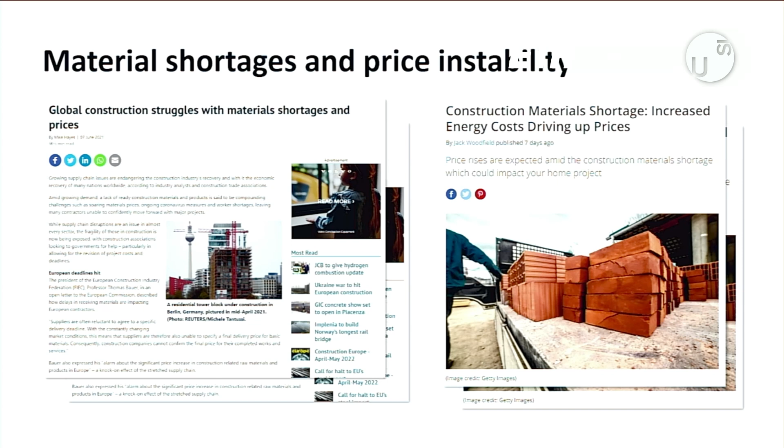These shortages in construction materials led to big price changes, particularly in things like mass timber, making construction very volatile in terms of building and pricing. And these are problems before we even address some fairly major problems in the built environment around carbon - 40% comes from the built environment.

About November time, every time I do a lecture, I use the World Counts website and take a quick screenshot to see where we are. For the last 3 years, we've been pretty much on track for 43 gigatons of CO2 emissions per year.

Perhaps one bright spot, the EU recently said that their carbon reductions are showing the kind of reductions needed - I think about 8% - to meet the Paris targets, but globally that's not the case.

I had the pleasure earlier in the year of attending the Buildings and Climate Global Forum in Paris, which was a breakout session from COP, specifically to look at the issues in the built environment and how we would meet carbon targets associated with Paris.

There I saw and heard lots of enthusiasm from nation states to develop plans and commit to decarbonisation by 2050, but without very many plans actually in place. At the same time, lots of ideas and lots of enthusiasm for how to solve the problem.

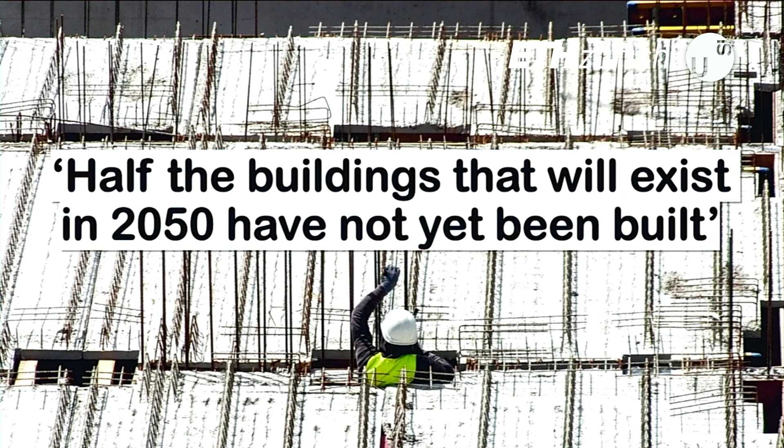According to the UN, by 2050, half the buildings we'll have then don't exist now, so we're almost doubling our building stock.

We're obviously talking about buildings, but in terms of infrastructure, there's a huge infrastructure gap according to the World Economic Forum. We also see, with the tragic events in Spain, that we're going to be building a lot of infrastructure just for climate resilience. So there's a huge amount of building in front of us.

We have 4.2 billion people living in our cities, and that rapid urbanisation, largely unplanned, has led to some really poor conditions. Sao Paulo, for example - and I find this astonishing - went from 2.5 million to 22.5 million in the period of about 50 years.

That rapid urbanisation means we have 1.1 billion people living in inadequate housing. And if we're really serious about the Sustainable Development Goals, then we need to build housing as a basic need and all of the social infrastructure that goes with it. So the outlook is that we have a lot of things that we need to build for society.

And then there's another 3 billion people coming to the planet by 2050. That in effect equates to 100,000 houses per day.

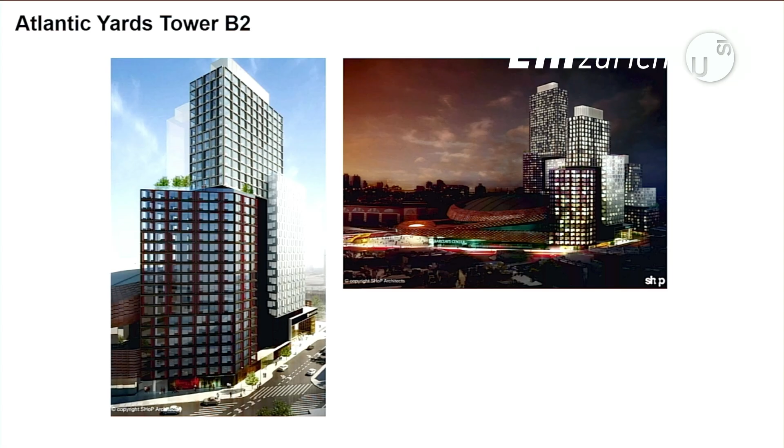But at the same time, a lot of modular contractors have failed in their efforts. This is an example project from our New York office, Atlantic Yards. It's still with SHoP Architects in New York. It's one of the biggest modular projects built, but there were huge issues with how to deliver this in terms of the contractors and the supply chain and so on. So the construction industry is still trying to solve this issue of how to do modular construction successfully.

But if we can get this right, then we really can change the way we build things. And I would also suggest that because it's a component-based design, a lot of the ideas that you're working on in terms of digital printing, fabrication, optimizing components can be integrated more easily into modular construction.

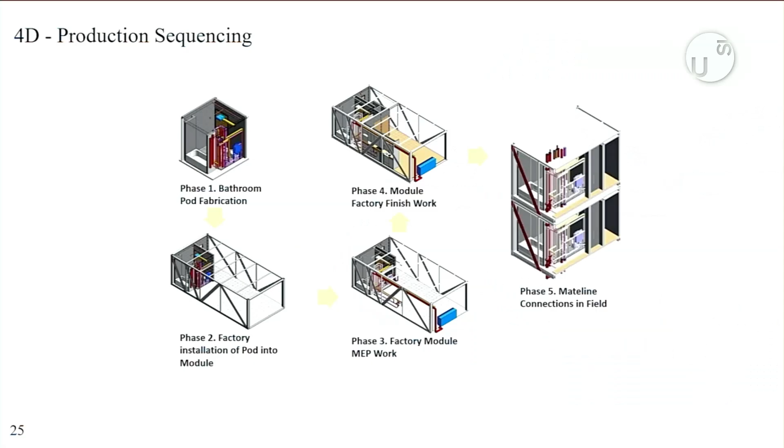It also offers a route into deconstruction, which isn't currently planned, but could easily be, I think. So very simple component-based design, putting things together, being able to be very selective about each of the materials and the waste streams that come with it and the reuse potential.

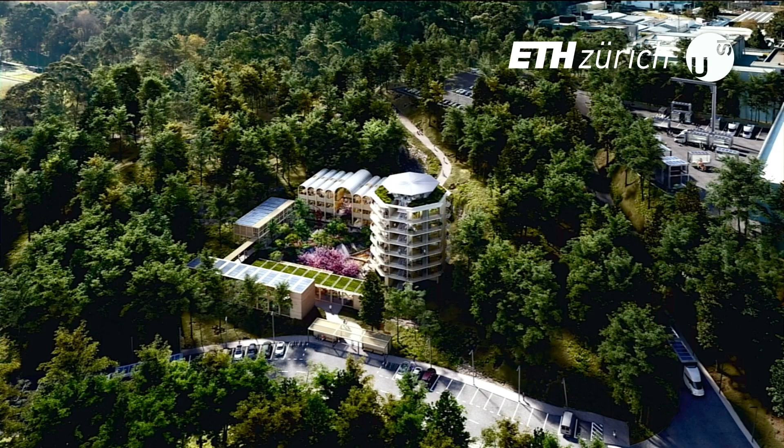And I'm working at the moment with the Norman Foster Foundation and a contractor in Portugal to develop a modular housing system that could be expanded across Portugal and Europe. Their idea of changing construction, but a hard path ahead because modular construction is very difficult to bring to the market. And then off-site construction.

It's an assembly of parts. Whilst this wasn't designed to be disassembled, it could easily be, and that's the next step, that we design this for disassembly and then we can change it and develop it over time. Because a lot of these commercial buildings, design life of many of the components is under 25 years. So we can already see a future where this is reshaped and redeveloped.

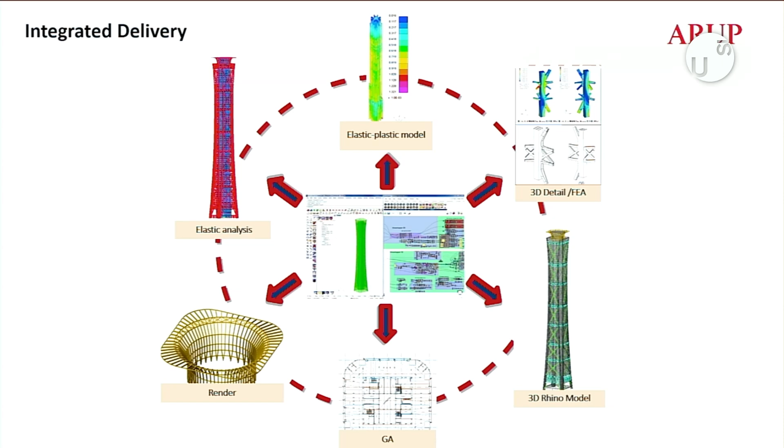But by putting together all of the computer and software power that's available and linking programs, it's possible now to be able to optimize buildings like this to create the most value from the materials in terms of usable space in the building, but also to minimize the materials footprint of the building.

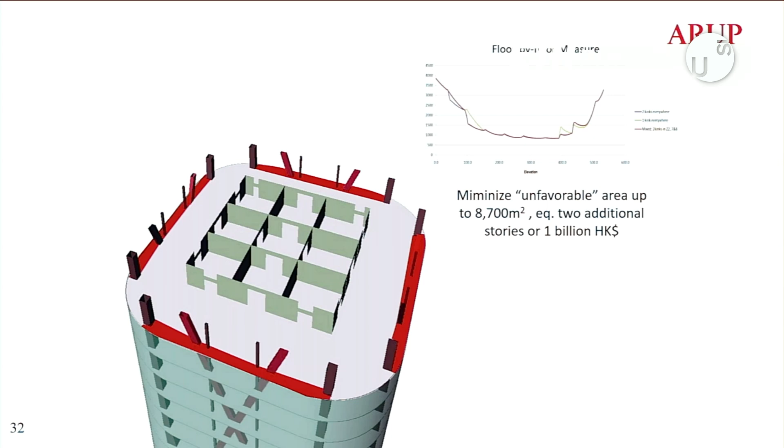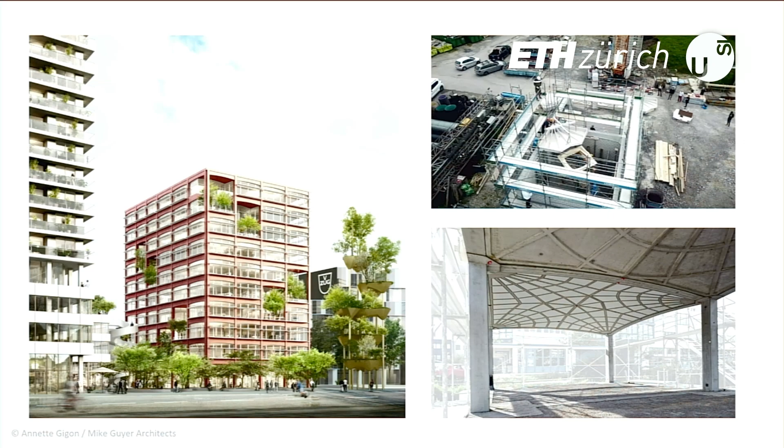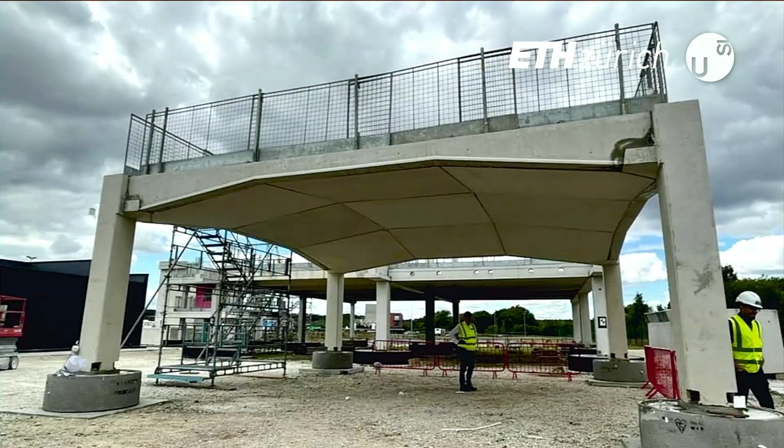In London, we've been working with Laing O'Rourke, the contractor for Leadenhall, to develop similar systems - I might call this perhaps 1D printed. It's precast flat slabs, 10 centimeters thick, arranged in compression. Laing O'Rourke tell us this has been very difficult to build and put together, so there's some development to do in the precasting technology. But in effect, this is replacing what would have been a 30 centimetre in situ slab, so 3 times as much material in our conventional solutions.

So huge opportunities to reduce the amount of materials we're currently using in our buildings. Optimization is basic common sense, but it's still not going to solve all of our problems when the demand is growing so substantially.

That brings us to the idea of reuse, particularly in a European context with a renovation wave. This project, now very well known, from Lacaton and Vassal, is a real exemplar. It's a housing development - they've done two, one in Bordeaux and one in Paris, where they're able to keep the residents in place. One thing you find when you look at these projects is that people want to continue to live where they live with the people they live with. So how do you upgrade and renovate these buildings? In this case, they added a bay to the building.

This project really caught my attention - it's in Canary Wharf in London, built about 25 years ago as an office-led development. I actually think it's a very good development, but through COVID, people have started working in different ways. Companies have rethought their portfolios. HSBC are leaving one of the main buildings in Canary Wharf, a 200-metre tall tower. So what do you do with it? Canary Wharf at the moment are completely rethinking what their development looks like, what their district looks like, and introducing ideas of mixed use into the buildings.

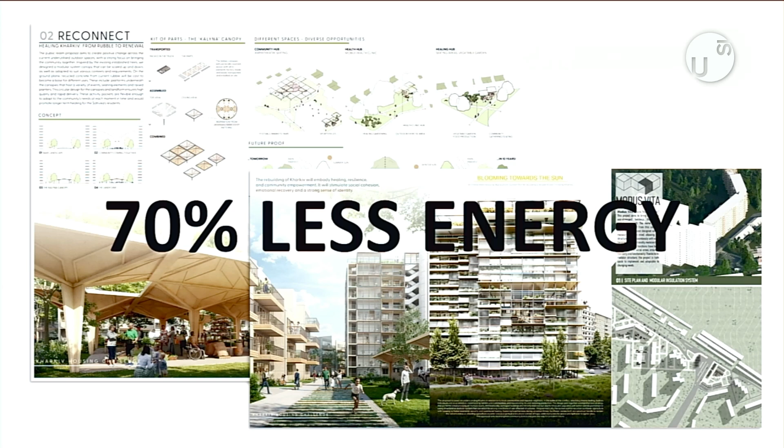We've just completed an international competition to look for solutions. One thing that stood out to me when we analysed these buildings is that by upgrading the building fabric, you can improve the energy performance by up to 70%. In Ukraine at the moment there's a huge rush to provide energy to power these buildings, but if we could somehow improve the energy performance, we'd really do a lot in terms of the supply-demand equation.

This is a project in London, again 25 years old, that we've been asked to revisit. Number 1 Triton Square, it's with Arup Associates. One important fact here is that we had all of the information on the building, a lot of digital information, so we were able to pick it apart. Although it wasn't designed to be changed and disassembled, that's what we've been able to do.

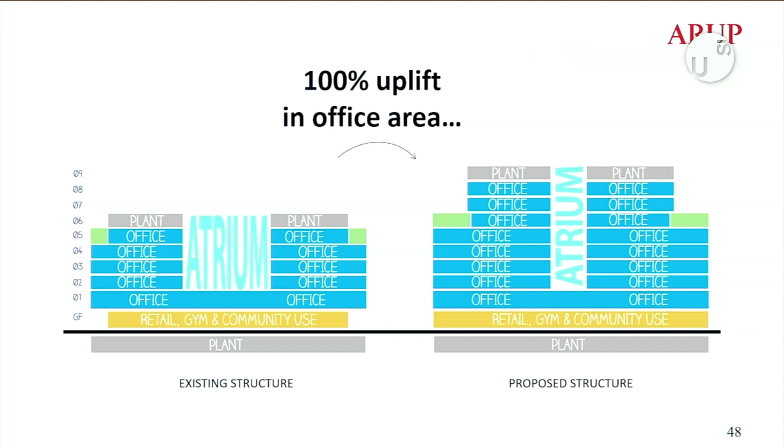It was also in the era of large atrium spaces. So by infilling the atrium and adding floors to the top, we're able to keep the character and the architecture of the building, but double its size.

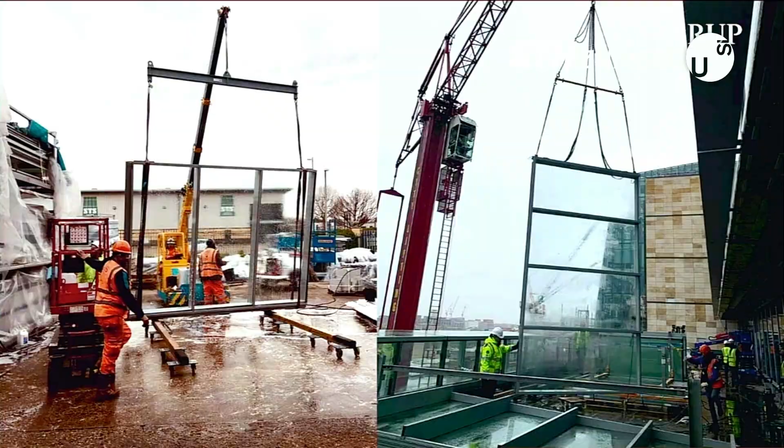Because of the data, we're able to look very closely at all of the components, take the facade apart, take it off-site to a pop-up site, refurbish and remanufacture the bits that were needed to change, put it all back together and then put it back on the building. With the stone quarry, we were able to reopen the old stone quarry, and by taking the stone off and mixing it up, we'll be able to create a new stone facade using all of the existing facade.

That to me suggests that there's a route to products as a service, which hasn't yet quite broken through into construction - this idea that you don't own your materials, you pay for a service, and it's the service provider who comes and upgrades it, takes it apart, takes the pieces back. There are obviously some very well-known examples in the construction industry, but over the last 5 to 10 years it hasn't become widespread. I think there's an opportunity there, particularly with facades.

And if we're going to be changing and adapting our buildings into the future, we should probably think about designing that in the first place.

This is an example from the London Olympics. It's called Here East. It was basically the media centre, designed with a large capacity structure. Afterwards, it's been inhabited with these WikiHouse kind of 3D printed or 2D printed houses that you can just put together and use as working spaces.

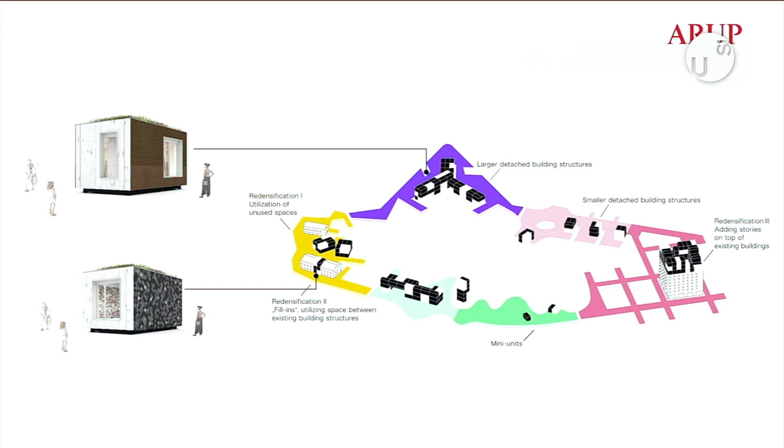We're working with a modular contractor in Germany, a startup, to look at building modules that will not just be for residential use, but for commercial use as well, so they could be used in all sorts of different typologies.

Back to Quay Quarter Tower, the atrium space is designed so that you can adjust and change it over time, which is one of the key issues in commercial spaces - that you can't change them, you can't connect floors, you can't subtenant them. But by making the atrium very flexible in that building, that perhaps provides that into the future.

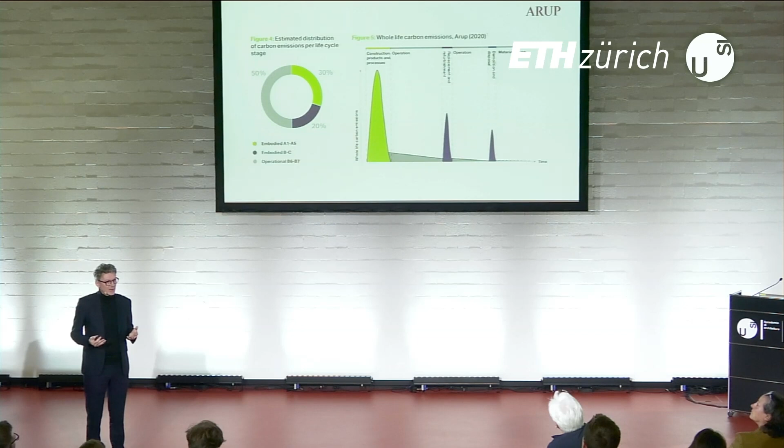If we look at where our carbon footprint is in our buildings, we recently made a study with the World Business Council for Sustainable Development, looking at a number of our projects and where the carbon was. In a well-designed building today, about half of it is operational carbon, but the other half is in the materials. About 30% of that is in the upfront materials, but then surprisingly, 20% of it is in the change of use over time in terms of material fit-out.

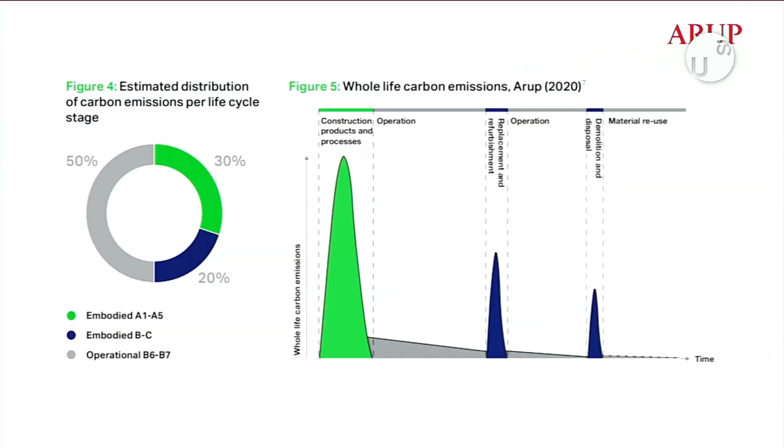So there's some real opportunities in designing our buildings more flexibly, being able to deal with materials as they come in and out of buildings over time, and developing the models that will allow us to do that. In terms of overall carbon, we'll probably get about 8% carbon impacts from steel manufacture, and about half of that is used in construction. About half of that is used as reinforcement in reinforced concrete, and that's a technology that hasn't really changed very much. So again, I think big opportunities.

It's very well publicised - I think even the public know that about 8% of carbon comes from cement. So what are we doing about that?

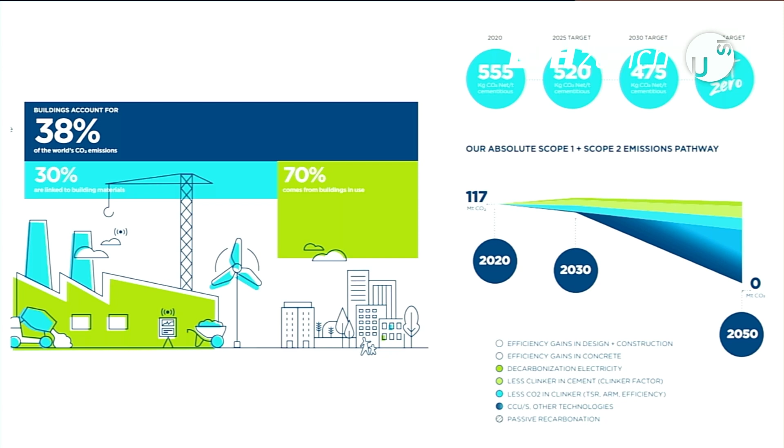This is a carbon reduction strategy from the Global Cement and Concrete Association, adopted by the industry. It shows a relatively modest reduction in carbon to 2030 before a deep dive to 2050. That deep dive is based on a number of things, but one of the big components is carbon capture and storage, which I think for our bigger materials, steel and concrete, is probably going to be necessary. Also included is around a 20 to 30% reduction in the efficiency of our buildings, the material footprint. Some of the examples I've already shown point towards how we might do that.

One of the projects I'm working on with David Chipperfield Architects in Stockholm, the new Nobel Centre, will be using cement from Heidelberg Materials. They have the first, I think, online carbon capture and storage plant in Brevik, Norway. But this is what it looks like.

So even with carbon capture and storage, there's a huge off-site impact. And since this is in Norway, they also have the opportunity to tie into the oil and gas industry - the carbon that's captured is basically pumped into deep mines that have had oil and gas extracted from them. So we might solve some of the environmental impacts, but we have to be aware that we could be creating others at the same time.

And so timber is an attractive solution. This is a BSkyB building, built very quickly - 12 months from when they instructed us to build it to when they walked through the door, using timber. So fast construction, lightweight fast construction.

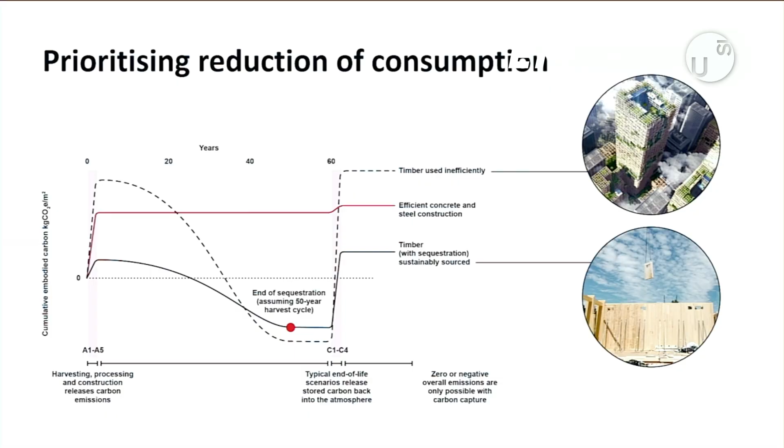And then when you look at the land use and the competing demands for land use, do we have enough timber to be able to use that as a scalable solution globally? If you look at the global demand for materials, I would suggest that we don't, and that we need to embrace all of our materials in different ways to make construction work in terms of materiality and sustainability in the future.

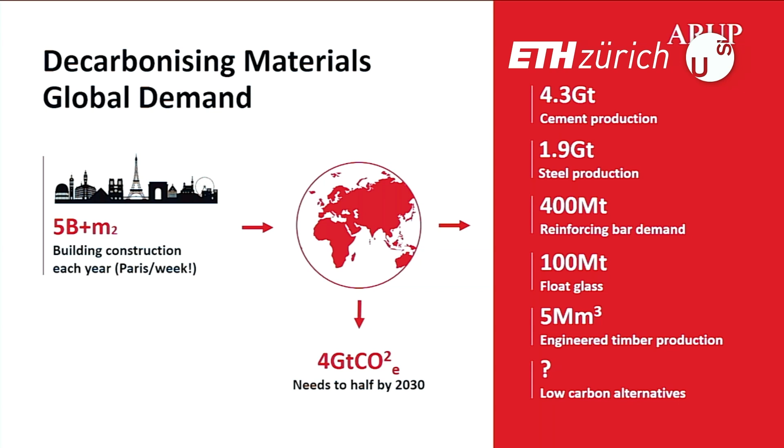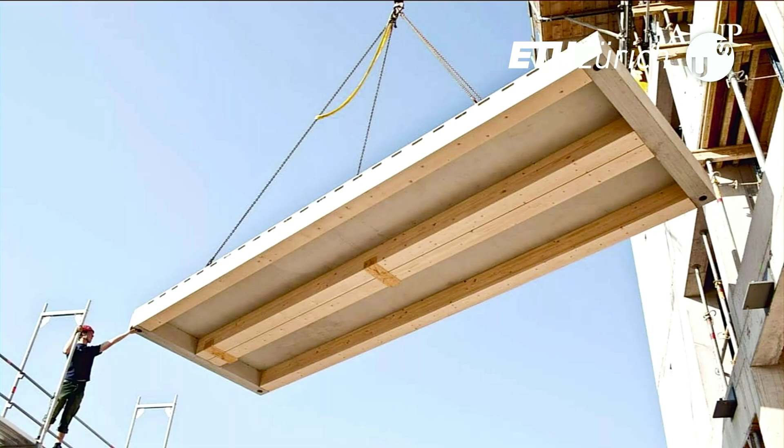It suggests that we need to increase the supply of biomaterials and timber into the supply chain in construction whilst we're decarbonising steel and concrete. And perhaps this points the way to using more hybrid type construction.

So timber concrete composites - they've been developing those in Germany. This is a project called H7 in Münster, one of the first timber concrete composite buildings. And I know you'll also hear from Roger Boltshauser.

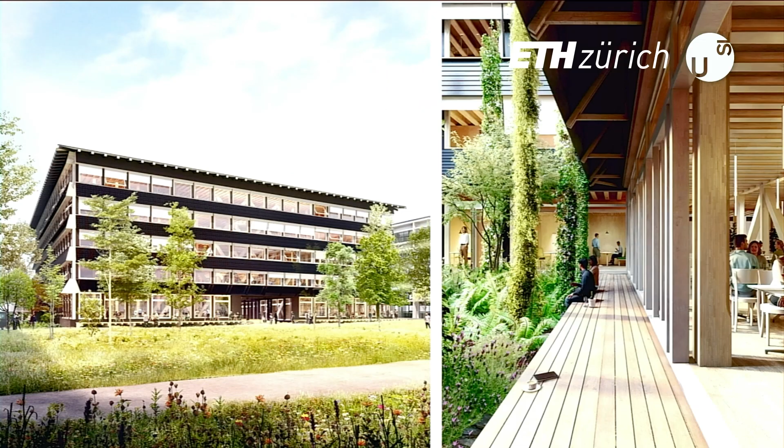This project in Zurich, H1, won one of the Holcim Foundation Awards - a fantastic project, and I hope he tells you more about it. He also tells me they've used a lot of rammed earth in the project, which of course is very topical at the moment.

As a structural engineer, I can't go to a meeting now with an architect without them suggesting to me that we should build it in rammed earth. So thank you to Martin Rauch for that contribution.

But this is Hortus with Herzog and de Meuron, a project I very much admire. It uses the earth from the site in timber forms to create a timber earth composite.

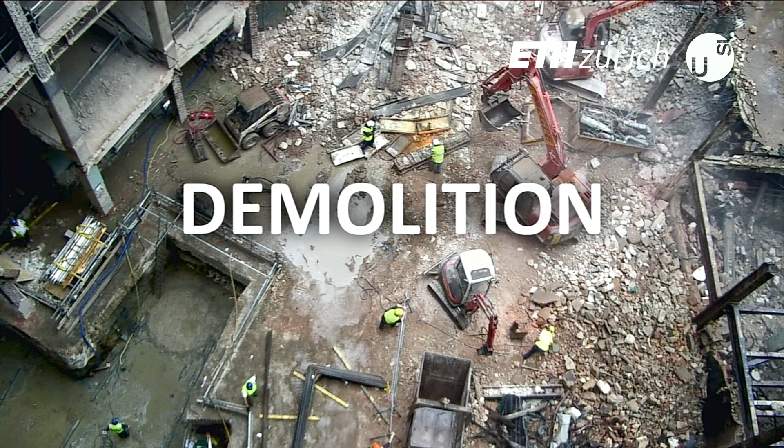But we're still going to generate huge amounts of waste if we don't change the way we build. In cities, probably about half the waste comes from construction waste. And whilst we're getting better at recovering it, it's mostly downcycled, I think about 90%.

That's aside from the issue of demolition. I looked across the skyline here yesterday and saw 3 tower cranes. If I do that in most cities, I'll see tower cranes everywhere. In Berlin, to get anywhere, I have to walk around a construction site. We're constantly living in our bigger cities with demolition, and I find it amazing that we are prepared to tolerate that all the time.

So the idea that perhaps we're not demolishing, but we're recovering materials and reusing them in a kind of urban mining deconstruction capacity. This project also won a Holcim award. It's in Winterthur with baubüro in situ, who I've found very inspiring in their work and their efforts. They collected used materials to make this building, but very much as a labour of love. There was no system within which they could do this.

I'm impressed by the work that Holcim are doing in France, looking at recovering building materials and concrete materials and then being able to use and recycle them. This is one of the first projects, but it uses a lot of technology and at the moment perhaps not scalable, but it points a way to the future.

This is a project called KA13 by MAD Architects in Oslo, which uses 80% recovered materials. In Norway they have a program called Future Built, which provides support to people developing sustainable projects, and I find the program very impressive.

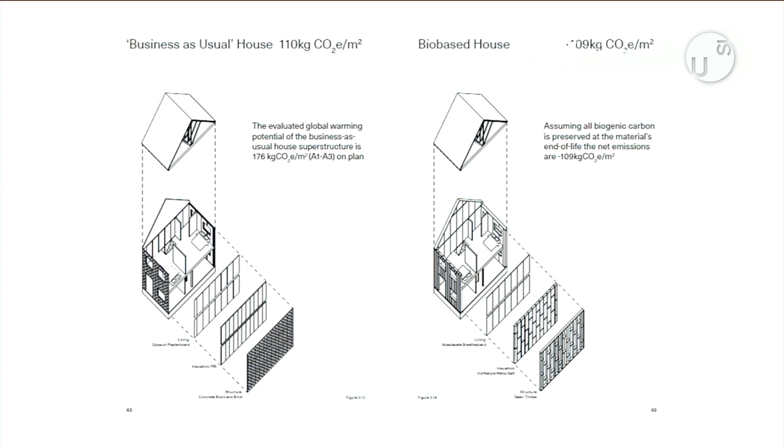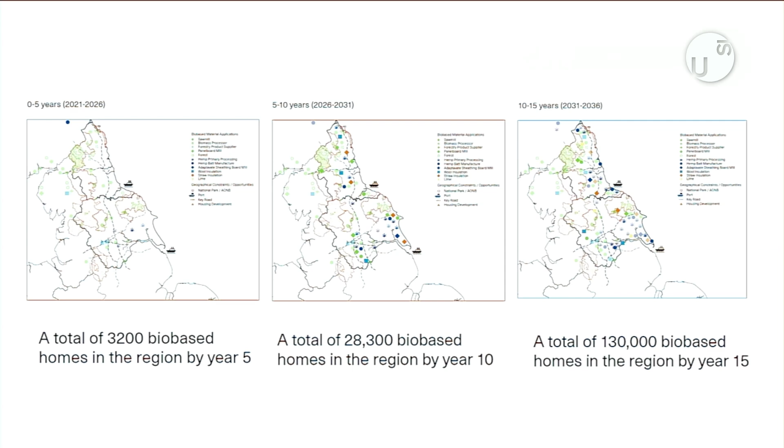Then a study we did for a region in the UK, North East Yorkshire, looking at the material supply chain in the region. The idea was to look at the business-as-usual house and potential biobased houses and the carbon storage that would offer, to look at the region as a whole, then plan and manage how you'd grow those materials over time and increase the supply of housing in the region. So the idea that we're able to gather our materials and manage the resource, and actually improve biodiversity in a managed landscape to create the housing that's needed, I thought was a very powerful one.

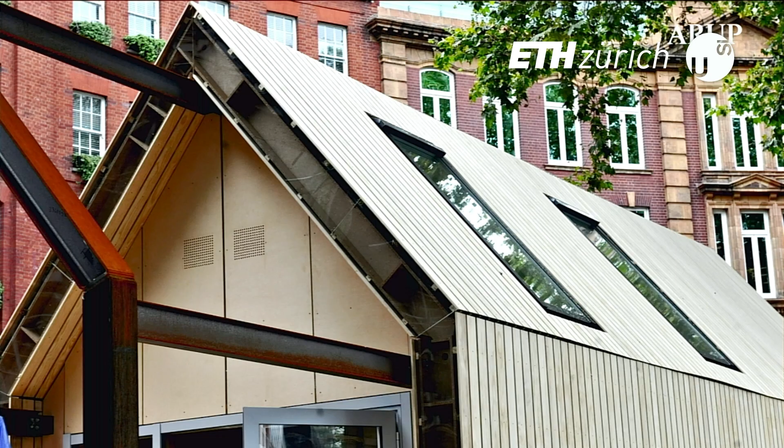And if we can fit all of that into the basic principles of circular economy, so keeping our materials at highest value for as long as possible, perhaps we can start to solve some of these problems. I created a prototype project in London, Circular Building, to explore how that would happen. A lot of the projects I've shown you fit now into those principles.

At the time I was inspired by a number of people working on similar prototypes. Dirk Hebel, I think you will also hear from perhaps, with the project at Nest. Peter van Assche and the People's Pavilion, the idea of just putting together the building, taking it apart and giving it all back. And Kasper Guldager Jensen at 3XN working on a project called Circle House, which was looking at concrete components and using Pico connectors to put it all together and take it apart.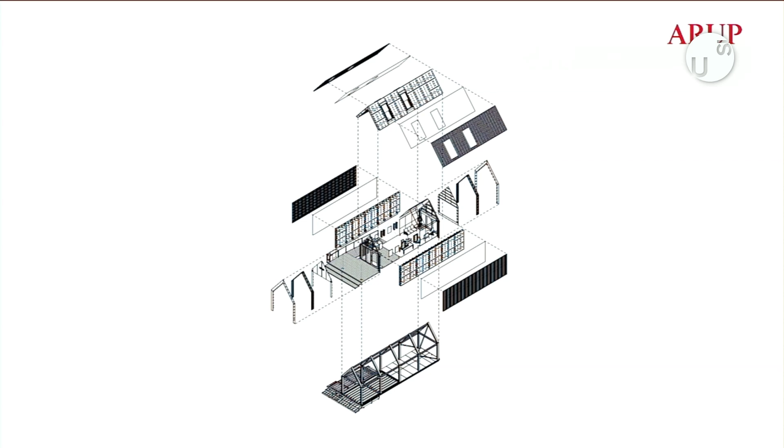The idea of the circular building was that all of the components could just be put together and given back to the supply chain for remanufacture afterwards, creating no waste. The idea that all of those components would have material passports so you could track them over time and understand what was in them, using the basic principles from the research by Stewart Brand of breaking the building down into layers.

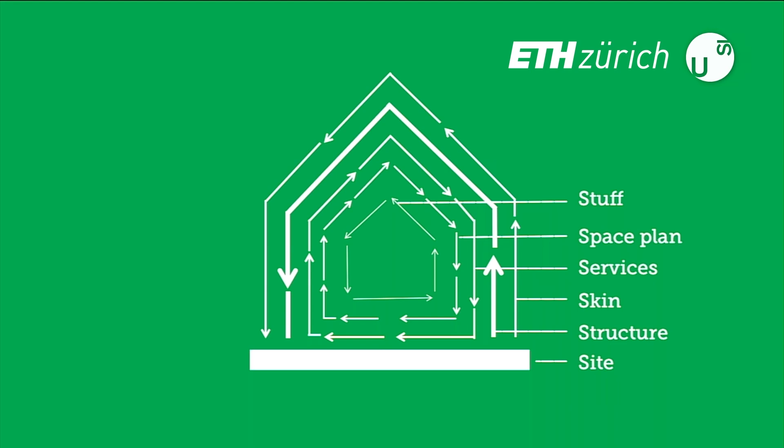This has now become a very well-known diagram. But when he studied the issues created by buildings and their change over time, he appreciated that it was the interface, the shearing between the layers, that was causing the problem. And I think that's what we see in our buildings. So if we can design our buildings with a more layered approach and think more about time, then we can facilitate circular economy and recovery of materials.

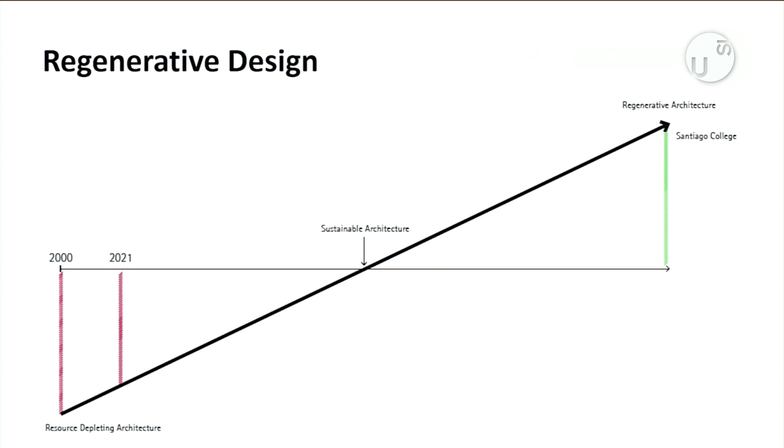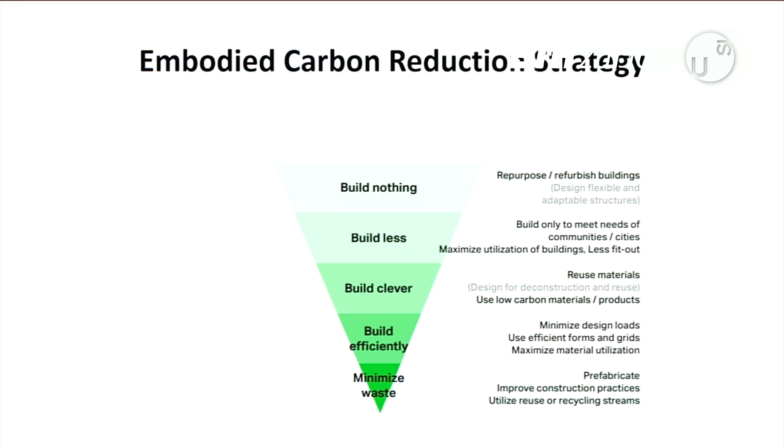And if we can manage where the materials are coming from, perhaps we can start to head towards regenerative design, whereas at the moment what we're doing is having a negative impact. We're trying to do less harm, but the idea of regenerative design is that we could do more good. So if I come back to our carbon reduction strategy of build nothing, I want to add this extra layer on top, which is build regeneratively. And I think if we can do that over the next 25 years, we really can change construction and make a difference. Thank you.